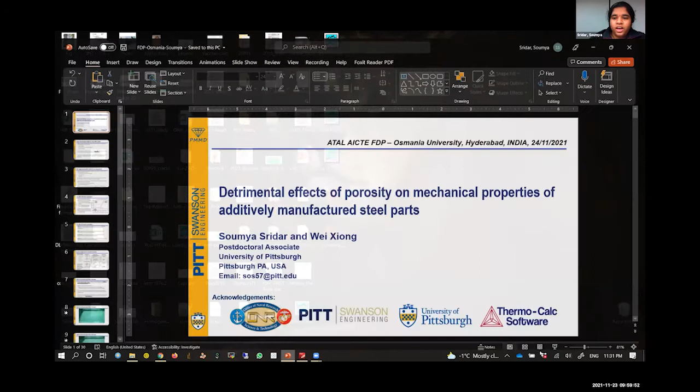Good morning, everybody. It's morning in India, but it's midnight in the USA right now. So I'm Soumya Sridar, and Srividya has already given me a fair amount of a good introduction about me.

So let me go directly into the talk. I'll be talking today mostly about the ill effects of porosity on mainly the mechanical properties of additively manufactured steel parts. I do know that these sessions are mostly related with novel materials, but today what I want to show is how additive manufacturing can be applied to an age-old material, a material that has been studied for the last 70 to 80 years, but mainly a weldable material, a material that is used for welding. Now, how to apply additive manufacturing, and some research lessons out of it, I would say.

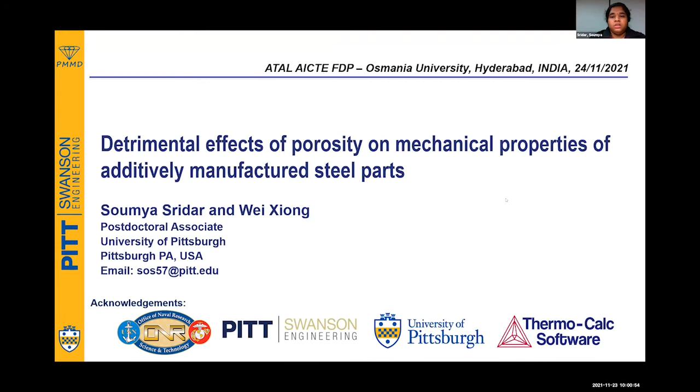So first, the material what I'm going to talk about is copper bearing high strength low alloy steels. As the name says, it's a high strength, low alloying content, but has copper. And these are mainly developed for naval applications. The three key features for the steel are: one is their high strength, as the name says, excellent low temperature toughness. As I mentioned that it is for naval application, it has to stand in the sea at ocean temperatures, like -20, -40 degrees C. And the ductile to brittle transition has to be at a pretty much lower temperature.

Otherwise, best example is the Titanic ship. Titanic hit and broke because it reached the ductile to brittle transition. So it should have excellent low temperature toughness. And the third one is good weldability, because we all know that while building a ship hull, the plates are welded together, so good weldability is needed.

So there are different grades of HSLA steels available. Generally their names will be called like HSLA 80, 100, 115, as I have shown here. These numbers denote the minimum yield strength in KSI. Since it was developed in the US, they simply put the imperial units, but it's in KSI. So 100 KSI roughly comes to around 700 megapascal. So the minimum tensile yield strength should be 100 KSI, let's say it's HSLA 100, should be 100 KSI or somewhere close to 700 megapascal.

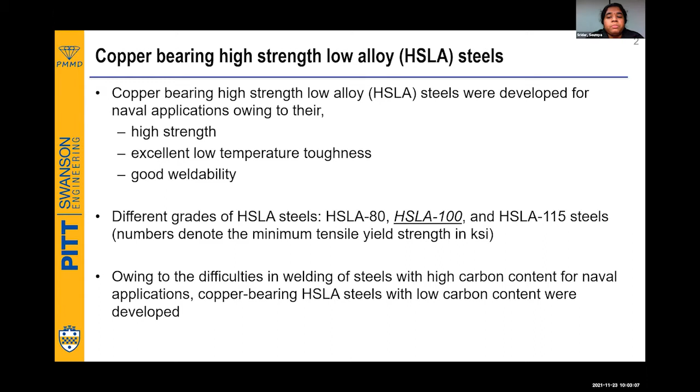Now, why were these developed? Mainly because high carbon content is going to have difficulties in welding, and for naval applications we need weldable steels. So copper bearing high strength low alloy steels with low carbon content were developed mainly for the purpose of improving the weldability.

Next, why copper bearing HSLA for naval application? If we see the reason why this has been chosen, let's first see what are all the applications. It's going to be used in submarines, offshore structures, line pipes, and ship hulls. So the main application is ship hulls, which is going to be directly in contact with the seawater.

Now, the main point is that here, when the yield strength is good, please forgive me that I added mostly in KSI, but I've also given the corresponding values in megapascal for you to have a sense of what the strength value should be.

So some 55 KSI to 80 KSI increase in yield strength, the weight reduction is nearly 800 tons. It's a huge number, so it's a weight effective way of dealing with the material.

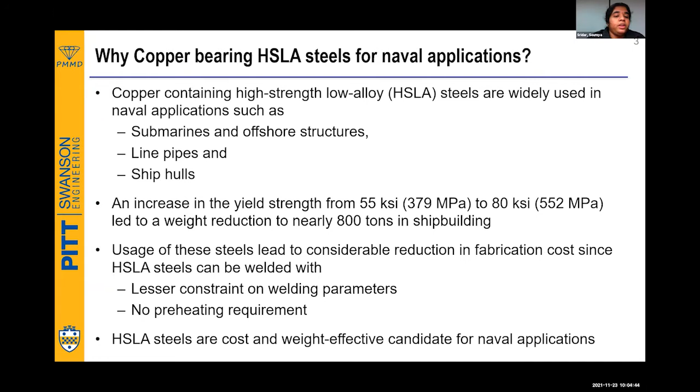Second, we are going to have very good weldable steels. Steels with very good weldability mean we are reducing the fabrication cost. The weldability has been improved by having lesser constraint on the welding parameters, and most importantly, no preheating. In high carbon steels, you need preheating to reduce cracking in the heat affected zone. That is what we are trying to avoid here, no preheating and lesser constraint on welding parameters.

Among the steels I mentioned, HSLA 80, 100, 115, and so on, HSLA 100 is more or less very popular. HSLA 100 and 115 are very close in composition and strength. So HSLA 100 is the mostly sought after steel. Let me go one by one through what's going on.

So the carbon, I'm talking about low carbon steel. What is the carbon content? It is less than 0.06 weight percentage. Why is this amount of carbon chosen? Let me switch on the laser pointer. That is because of this Graville weldability diagram. It's a plot between the carbon content and the carbon equivalent, which is calculated using this formula. It's completely empirical.

If you see here, there are three zones. Zone 1, if your composition is in zone 1, it is going to be safe under all conditions. Zone 2, it may fail or may not fail. Zone 3 is going to fail without any doubt. So we have to choose a carbon composition and carbon equivalent such that the weldability is always restricted to zone 1. That is the reason why this carbon content has been chosen.

Secondly, this main problem of hydrogen induced cracking. This hydrogen induced cracking is actually a delayed fracture, happening because of hydrogen, since it is standing in water for a long time, there is always a possibility for hydrogen to enter. The problem with hydrogen induced cracking is there's no guarantee it will fail immediately. After the hydrogen enters and creates the embrittlement, it can either break today or break even after 2 months. That is the problem with hydrogen induced cracking.

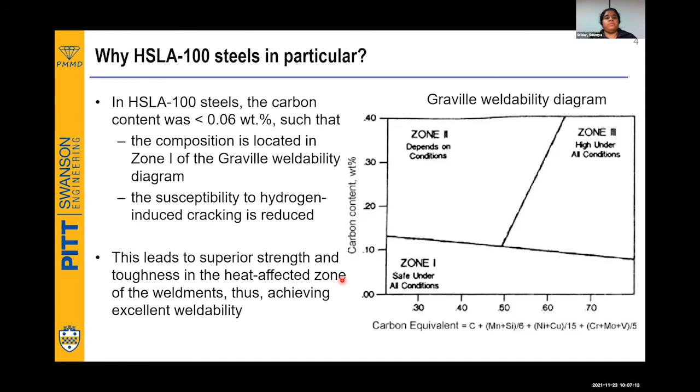We have reduced the carbon content, but we all know carbon is the main strengthening element in steels, and we are reducing it. How are we going to compensate for that? The main addition for that is copper first. So copper is being added, that's why it's called copper bearing high strength low alloy steel.

Copper is going to induce precipitation hardening by forming pure copper precipitates, sometimes even called clusters. This is going to balance the loss of strength due to lowering the carbon concentration. So it's like a nested problem: if you reduce the carbon, the strength is gone. Now you're adding copper to improve strength, but copper is an element that segregates in the grain boundaries and causes hot cracking, and to compensate that, you add nickel.

Finally, we also add molybdenum for precipitating another type of precipitate called M2C, where M corresponds to molybdenum, another type of carbide. In order to precipitate another type of carbide commonly found in steels, we add niobium, which precipitates niobium carbides. These are called pinning particles, they sit in the grain boundaries during the austenitization process and inhibit, that is stop, the grain growth. That's why niobium is added.

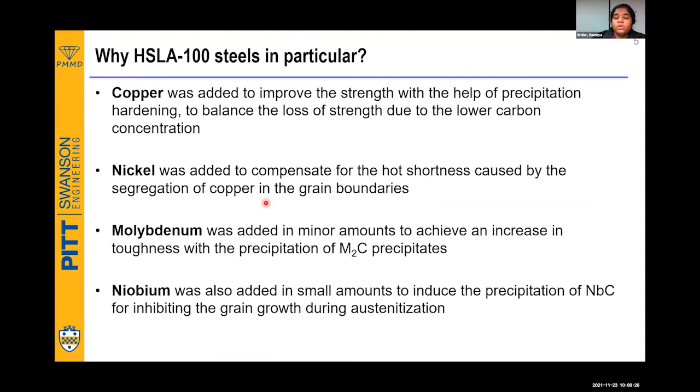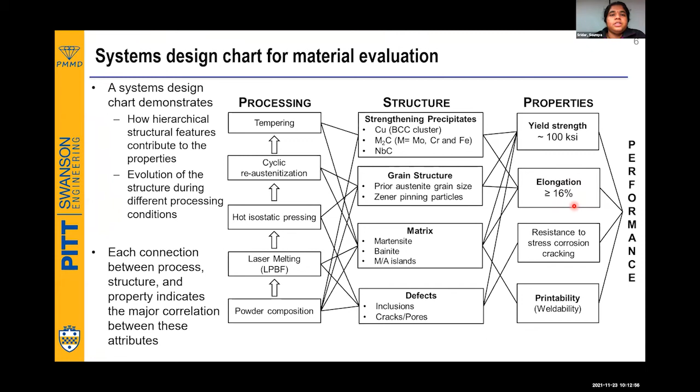So, additive manufacturing - this is just a primer. I think many would have spoken a lot about additive manufacturing. For the sake of continuity, I am just giving a few points about it. Additive manufacturing is a process for fabricating, layer by layer,

fabrication using 3D numerical models, which is completely different from the traditional subtractive manufacturing technologies. You don't take a big billet and then machine it to get the part. Rather, you're adding layer by layer to get the required part you want. And one more important thing to keep in mind is it's a near net shape forming process.

And how do we classify it? There are loads of parameters based on which it can be classified. But mainly, if we have to see, it is based on material. I think I'm a material science person, so from a material science point of view, I find these two to be the most important classifications.

One is based on material feedstock - that is, you have a powder bed process, powder feed process. Powder bed is nothing but the LPBF, that is laser powder bed fusion, or they also call it SLM, selective laser melting. Powder feed, that is directed energy deposition, DED. This is powder feed. Another one is wire feed.

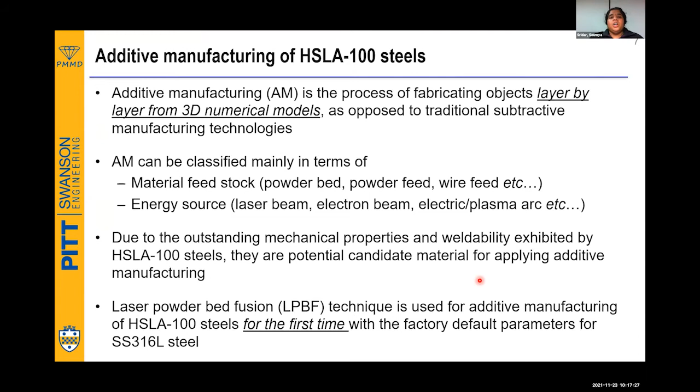Instead of me showing some schematics, I thought I could try to play a video here which was shot during our printing of the HSLA steel powder.

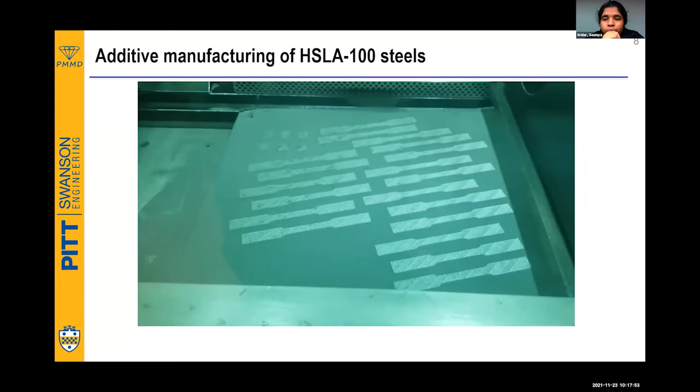You see the recoater spreading a uniform layer of powder, and the laser is going to hit it. We are trying to build tensile bars here; our build plate dimension is 250mm by 250mm. If you notice carefully towards the end, there is something going around along the periphery - that fast scanning is done to create a better surface finish, called a contour print.

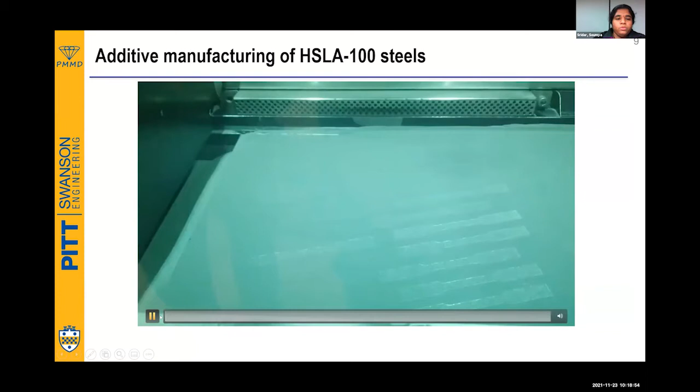Now you see the laser scanning going more or less parallel to each other. I think it won't run long. So this is layer 1. Let me go to the next layer, layer 2, to show how it's being built - layer 1 has now been built.

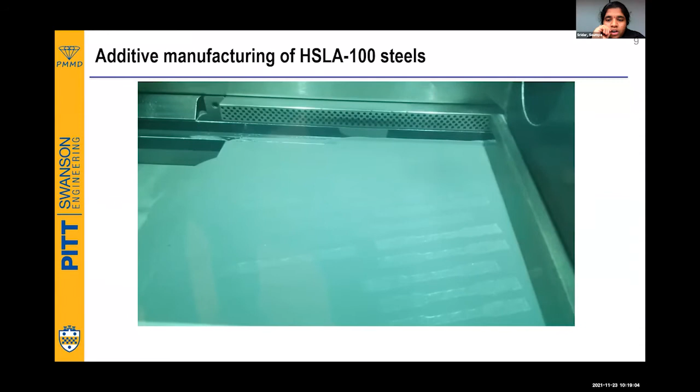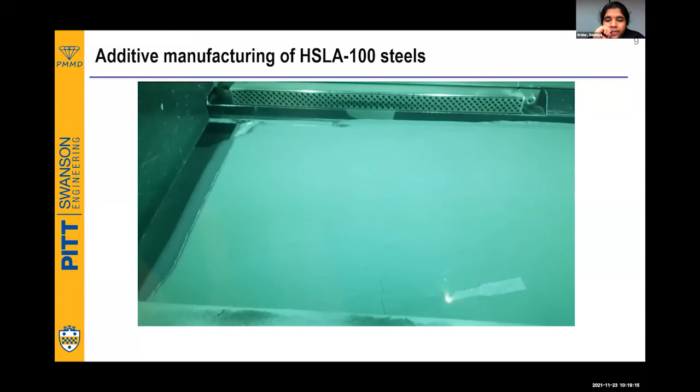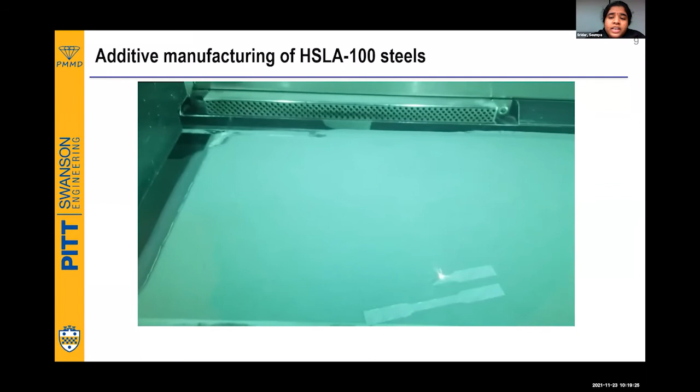Now the recoater is going to spread the next layer of powder. Here we go - please see the orientation of the laser, we are rotating it, right? Initially the first layer was completely horizontal, and now it's slanting at an angle. I think typically we use an angle of 67 degrees.

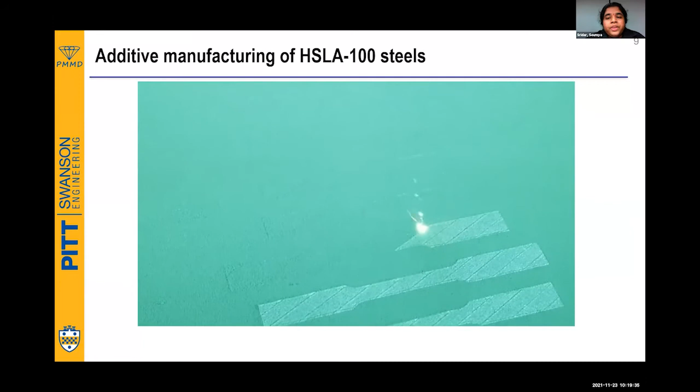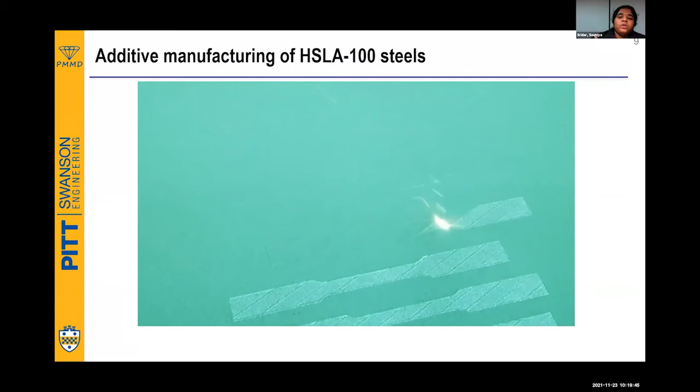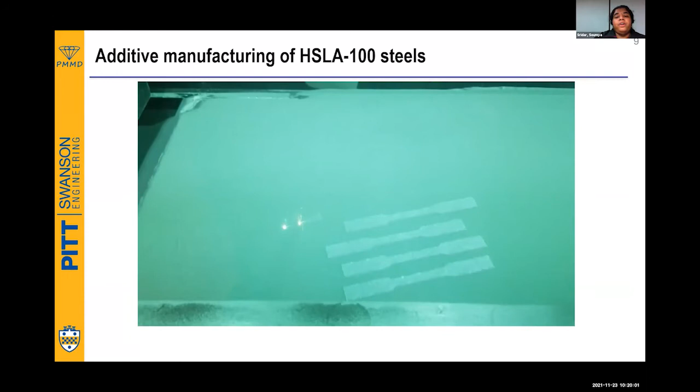Close up view - this is done mainly to avoid residual stresses. So in layer 1, the rastering happens parallel to each other, and in layer 2 we rotate it by 66 degrees. Again layer 3 is horizontal, layer 4 is 66 degrees. We do this complete rotation change for every layer to avoid the buildup of residual stresses.

Okay, now, sorry, give me a minute.

So here I'm showing a build plate. Let me switch on the... So this is the build plate. This is a 250 mm by 250 mm build plate.

And these are basically fatigue bars which we built recently. And you see that we don't keep the samples parallel to each other. We slightly slant it a bit by 5 degrees, which has a particular reason.

But yeah, so these are all the horizontal prints, and this is a vertical print. So this is a vertical tensile bar. I hope it is visible as a tensile bar in a certain direction. So these are all vertical prints.

So typically when we do prints, in order to study the effect of orientation, we build horizontal bars like this, vertical bars like this, and also bars that are slanted at 45 degrees to the build direction. So in order to study the effect of anisotropy on the mechanical properties, we generally do this, but mostly horizontal and vertical should suffice in most of the cases.

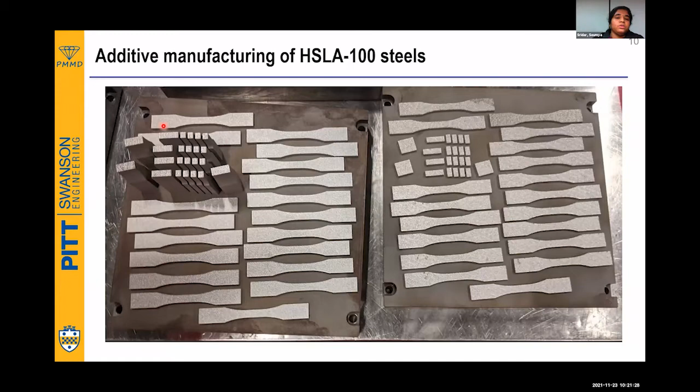So just wanted you all to see how the build plate looks and so on. So coming to the important thing, the role of porosity.

So always porosity is a problem in most of the cases, but here in the case of AM parts, mainly two types of properties are going to be affected. First one is the mechanical properties, where it is going to affect the tensile strength and the elongation by acting as local stress raisers.

However, the pores will also affect the corrosion resistance, because pores are nothing but pits, which can be viewed as a primer for pitting corrosion. So the corrosion rate within the pits will build up because of severe electrolytic conditions, leading to a stable pit growth.

And a small pit which goes throughout the sample is going to lead to cracking further. Also, the effect of presence of residual or applied stresses can lead to stress corrosion cracking. Hence all these three problems are not simple and have to be dealt with.

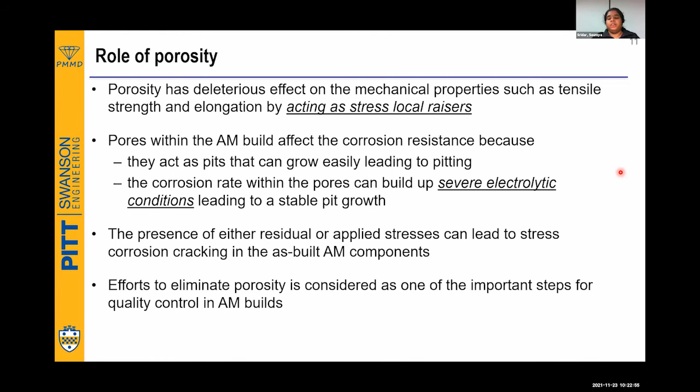So eliminating porosity is one of the important steps for quality control of AM. If you want to really put your additively manufactured component into service, porosity has to be eliminated by any chance. Now, as such, we can see a pore is a hole or something like that, but it's not so simple when it comes to AM builds.

There are three types of pores that have been identified for AM processes. The first one is called the type 1 pore. Type 1 pores are perfectly spherical pores that form due to entrapment of shielding gases. What happens is the gases get trapped within the melt pool and are not able to escape due to the vapor pressure.

But the good news about this type of pore is that it's typically not detrimental, because of two reasons. One, they are spherical, so spherical pores are not a serious issue. And secondly, they are only a few nanometers to micrometers in size. They are not very huge pores.

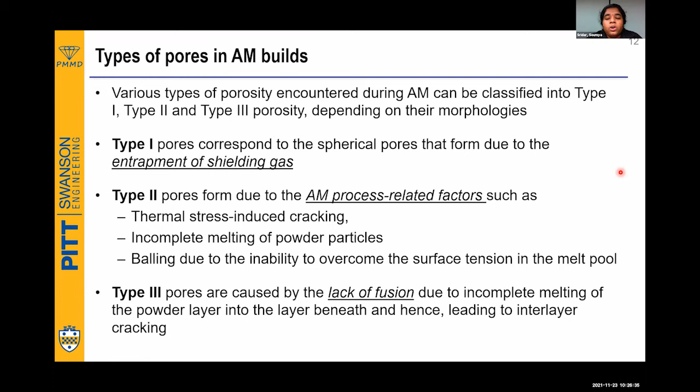These interlayer cracks will generally be of lesser circularity, so they won't be as spherical as the type 1 pores. These are some of the types of pores found in one of our AM builds, I would say.

You see that the type 1 pores here are more or less typically spherical. The type 2 pores, no wonder they are dangerous—as you can see, they are pretty sharp, and they are surely going to act as stress raisers. You can see this one, and so on.

And type 3, you can clearly see a melt pool will generally be a cup-shaped melt pool like this. You can clearly see a lack of fusion happening here, which is a type 3 pore. As I mentioned, this is why it's called low circularity, and this one is more or less circular.

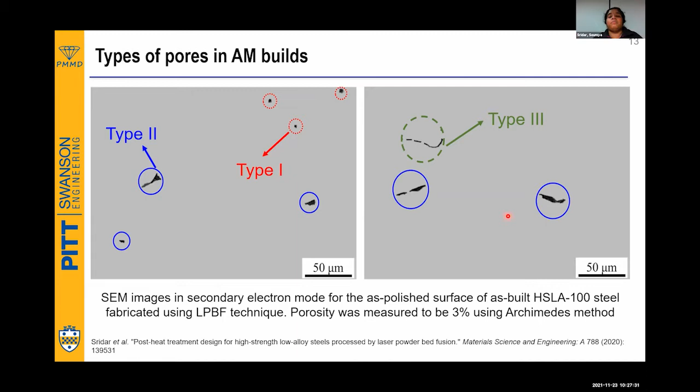Now the porosity measured for this build using the Archimedes method is around 3%, which is an alarmingly high porosity. So what are all the ways to mitigate porosity in a porous AM build?

If a build becomes a failure, we don't always need to throw it out, because we have spent a lot of energy, and they even charge us for doing additive manufacturing builds here.

So there are two ways to mitigate: one is to design an appropriate post heat treatment schedule, and the second is to optimize the printing parameters.

When I project these two solutions, it's kind of common sense to say that before you start printing, just optimize the printing parameters for the AM process, for that particular process, and then build all your tensile bars and so on.

But we need to understand that in many cases we won't have enough powder. We are not always having kilos and kilos of powder which we can lavishly use. Sometimes the amount of powder available to us might be pretty low.

If that's the case, to optimize the printing parameters, what we generally do is build cubes with different printing parameters—like different scan speed and laser power—print the cubes, find the porosity levels using Archimedes, and do a second level of checking with the closed pores, and then figure it out.

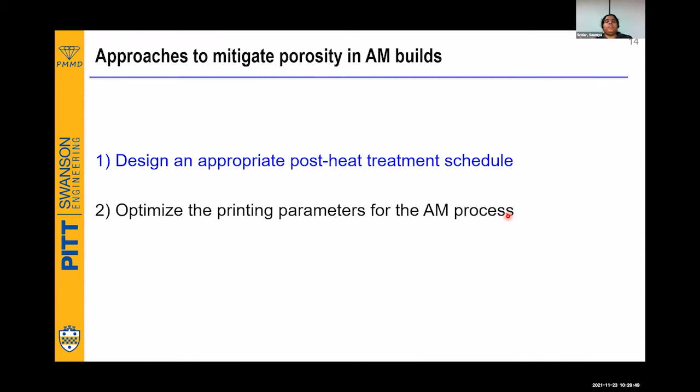So in this talk today, I will mainly be dealing with how to design an appropriate post heat treatment process to reduce the porosity. The post heat treatment I am going to propose is hot isostatic pressing.

This hot isostatic pressing is a well-known process—many of you might already know it. The idea is we have a pressure vessel in which we keep our component, and there is a heater, and pressure is applied isostatically, meaning equal pressure in all directions, using an inert gas atmosphere to avoid oxidation or other related problems.

So why do we go for hot isostatic pressing? As I mentioned, we do it at high pressure and high enough temperature in an inert gas atmosphere, and it closes the pores. What we want is pore closure—either collapse of pores or pore closure—which happens through either plastic flow or some material transport. But why HIP?

As I emphasized earlier, additive manufacturing is a near net shape forming process, so I should not do any post heat treatment process that would spoil the shape.

Every time we're not going to build only simple cubes. If we're building a particular part, let's say a tensile bar, I need to maintain the correct dimensions according to the ASTM E8 standards. I cannot afford to lose the shape or mess up the dimensions, so we have to maintain the shape. For this, HIP is the best method because the pressure will be applied uniformly throughout the sample in all directions.

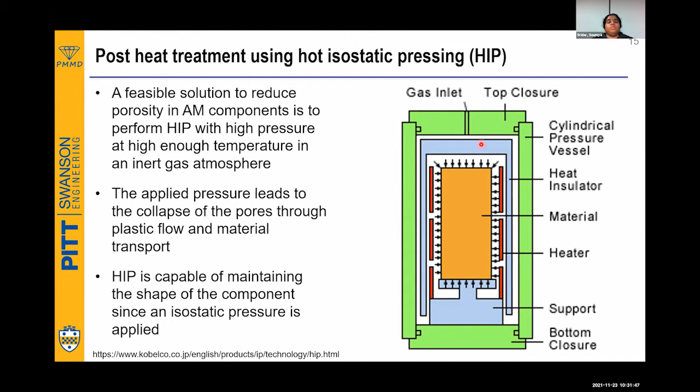So we have to do HIP, but we have to design it. For this reason, we use this calculation of phase diagrams method. I think we will be having a further talk by Dr. Guru Vidyarthi, who will be explaining this more. I and Guru are former colleagues, by the way.

So the fact is that we use this phase fraction diagram. These are all the different phases that are forming in this particular steel I'm talking about, as a function of temperature. I hope everyone will be familiar with the AC3 temperature. AC3 temperature for a steel is the temperature at which the material becomes complete austenite. Now, the AC3 temperature for this steel is going to be 754 degrees C, as calculated using this CALPHAD method.

However, due to the errors, because this is an equilibrium calculation and there could be other effects since what we are doing is a completely non-equilibrium process, additive manufacturing, to take that into account, we are increasing the austenitization temperature to more than 200 degrees C above, setting a temperature of 950 degrees C.

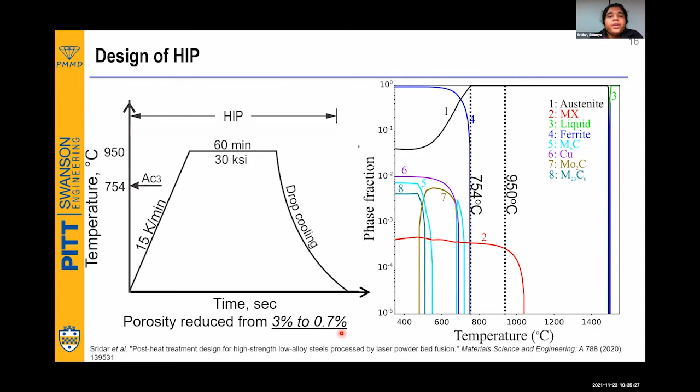But the good fact we should be happy about is that the porosity reduced from 3% to 0.7%, which is a very good number. So whatever we wanted has been achieved. Yes, we reduced the porosity thanks to HIP, but my microstructure is gone. How? It has terribly coarsened the microstructure. So this is the before-HIP microstructure, and this is the after-HIP microstructure.

So these are the SEM micrographs, and you see there are two types of phases here: one with a surface relief, and one without surface relief. The one with surface relief is the martensite, which I call the hard phase. And the one without surface relief is called the bainite, which is the soft phase.

Now you see how fine it is here, but after I apply HIP, my bainite is growing, my martensite has become huge and so on. Thanks to this very slow cooling rate, my material has literally become spoiled now. If I'm going to check the mechanical properties, though the porosity has been closed, this spoiled microstructure is going to reduce the strength of the material pretty badly. So it has.

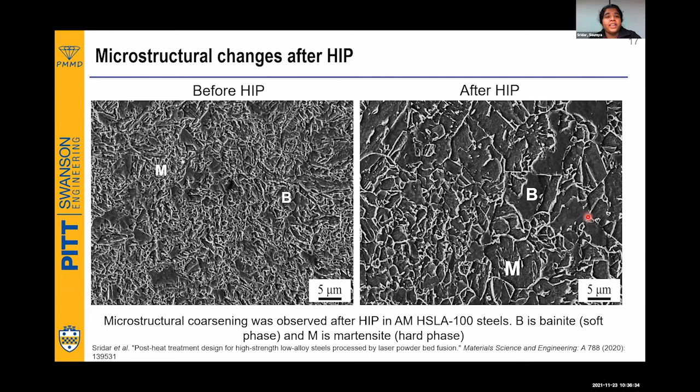This is the reason why I'm emphasizing that this is spoiled. How am I going to bring it back from that spoiled microstructure after HIP? This process is called cyclic reaustenization.

This is a post process where I have to do a grain refinement, since there is microstructure coarsening or grain coarsening. But this is near net shape processing, so I cannot do any deformation process to bring it back.

One common method for grain refinement is ausforming, AUSFORMING. If anyone is interested, they can read about it. But that will involve external forces, and we don't want any process with external forces applied.

So we go into this cyclic reaustenization. What are we going to do? After cooling has happened, we reaustenize, taking it to 950 degrees C again in a furnace without any pressure, above the AC3 temperature, for a very short time - just 1 minute - and then immediately water quench.

Water quench, not normal water quench, but ice water quench. And we do one more cycle. So this is one cycle: heating, holding for 1 minute, cooling, heating, holding for 1 minute, cooling. This is cycle 1 and cycle 2.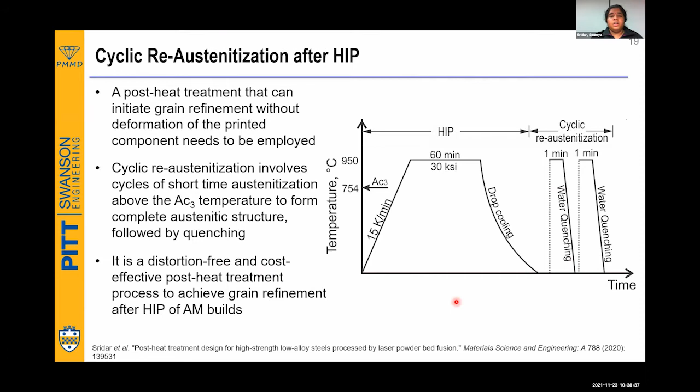We designed an experiment where initially we take it to 950 degrees C, all without pressure, hold it for 40 minutes to make sure the material has been completely austenitized, and then cool it. Ice water quenching typically has a cooling rate, a ballpark figure of 130 Kelvin per second, but we are trying to cool with a cooling rate of 100 Kelvin per second.

Then we are doing different numbers of cycles, with 1 minute holding at 950 degrees C. We tried 4 different cycles: 0th, 1st, 2nd, 3rd, and 4th.

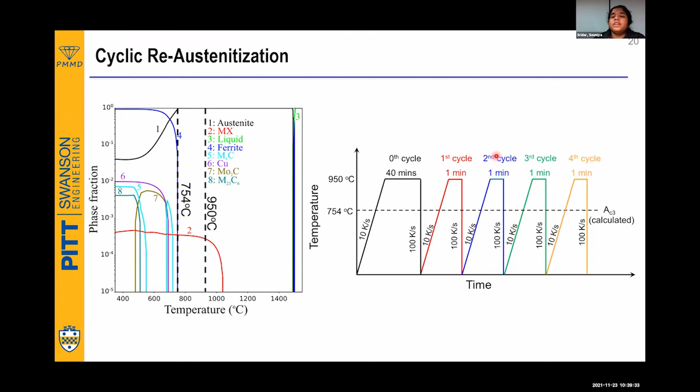And how are we going to do this? This is a not-so-new technique known as the quenching dilatometer. In the quenching dilatometer, it's a very interesting instrument where you have two push rods where you place your sample, sitting between these two push rods, and a copper coil that slides into position.

In the middle of the sample, you have a thermocouple welded that takes care of the temperature. And there's an LVDT which is going to check or record the length changes - LVDT is known for measuring very sensitive length changes.

You also have gas outlets, since we are going to cool it. In our case we were using helium gas, because even argon is not sufficient - we need helium gas to achieve such high cooling rates, literally cooling at a rate of 100 Kelvin per second.

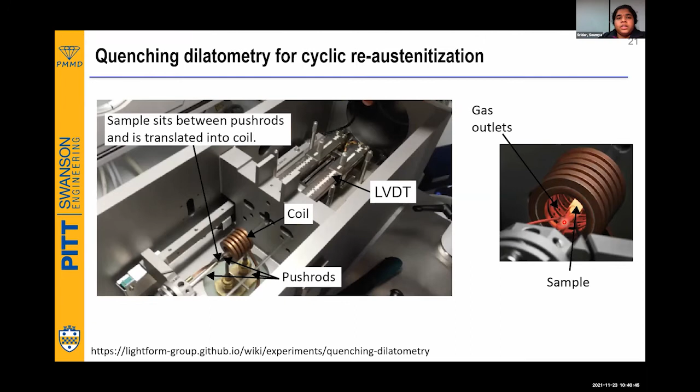What we get from this quenching dilatometry is the length change, measured by the LVDT, but we always take the percentage, that is delta L by L0 - L0 being the initial length, delta L the change in length, in percentage, along with the corresponding temperature. This is recorded and given by the software directly.

So what can we understand from this curve? One thing is that whenever there is a phase transformation happening, there is a volume change, which corresponds to a length change, and we can figure out the transformation temperatures. There are two types of changes - one is an obvious change.

Let me explain the curve here. This is the heating curve where we are starting at around room temperature, let's say 27 degrees C. You keep heating, you reach this temperature here, and there you go: austenitization. The austenite starts to form, which is the AC1, and the austenitization completely finishes, which is the AC3.

It keeps increasing, and then you have some waiting time, either 1 minute or 40 minutes. Then it drops down, and you start cooling at 100 Kelvin per second. It's going to go, and there is a slight slope change which corresponds to the bainite start. BS here corresponds to the bainite start temperature. Then you see an obvious change where this corresponds to the start of the martensite, which is the MS temperature, and this corresponds to the finish of the martensite transformation, which is the MF temperature. And again, it goes back to room temperature.

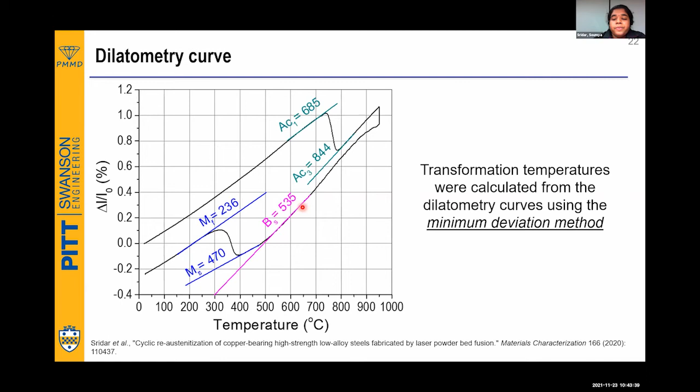So this is a typical introduction for quenching dilatometry, but our purpose is not that. I want to figure out the optimum number of cycles. So we did two things. One is find the micro hardness, and we find a sudden increase in hardness at 2 cycles.

And then what's going on? We do nano hardness using nano indentation, and what we see is that in nano indentation you can find the particular phase and make the indent in that phase. Here I'm showing 2 SPM images. SPM means scanning probe microscopy, which is generally attached with the nano indenter, such that you can allow it to scan through and see the topography of the microstructure.

Now, I already showed in the SEM micrograph that the martensite has surface relief, the bainite doesn't have surface relief. So you can see that this is a nano indent in the martensite, and this is a nano indent in the bainite. From the nano hardness, there is a slight change in the bainite hardness, however there is a notable change in the hardness of the martensite. This is not something which is usual.

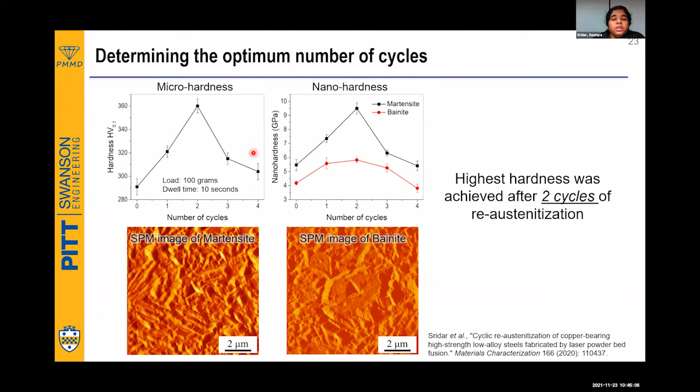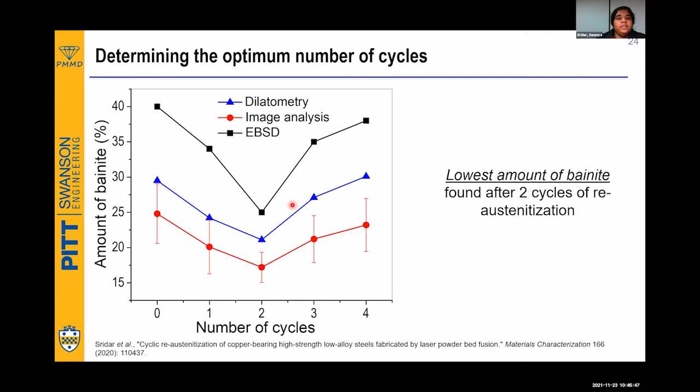So we probed it further to understand why this is happening, and we find that we have tried to calculate the amount of bainite from different techniques like image analysis, dilatometry, and electron backscatter diffraction. Though the numbers are slightly different from each other, one thing we can see is that for the optimum number of cycles, which is 2 cycles of reaustenization, the bainite content is the lowest, which means the martensite content is the highest. As I mentioned earlier, martensite is the hard phase, bainite is the soft phase. Lesser the soft phase, more hard it is going to be. Hence the optimum number of cycles was chosen to be 2.

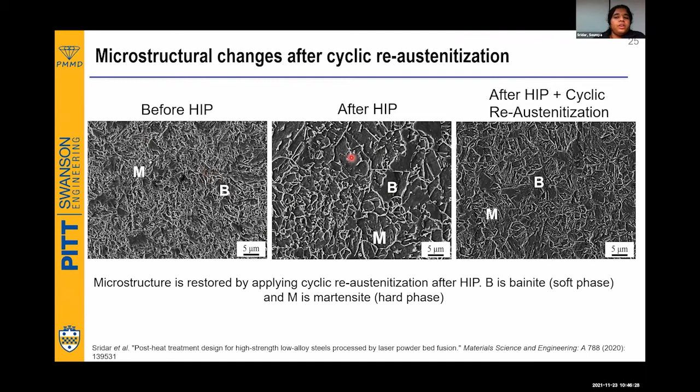With all this, was I able to reclaim the microstructure or not? Thankfully, yes. Before HIP, that is just the as-built structure, and after the cyclic reaustenization, after HIP and cyclic reaustenization, more or less we restored the microstructure. Coming to the bainite content, which is the soft phase content, measured using EBSD: before HIP it was 8%, after HIP it was a huge 33%, and now it has come down to 11%. So yes, we are fairly doing good, we have reclaimed the microstructure. But this is not sufficient.

So the next step is to do a tempering heat treatment to induce strength. Why? Because copper is going to induce precipitation strengthening, and similarly, addition of molybdenum is to induce the Mo2C precipitates. So in order to induce the precipitation strengthening, you have to allow them to temper, that is, you identify a particular tempering temperature. Again, from this diagram, since copper and the Mo2C are the major curves, that is curve 6 and 7, at close to 550 degrees C, the content of both 6, that is copper, and 7, that is Mo2C, are very high.

So we choose a temperature of 550 degrees C as the tempering temperature. At this temperature, we expect copper and MO2C precipitates will strengthen the HSLA 100 steel. We figure out the optimum tempering time by finding the peak hardness.

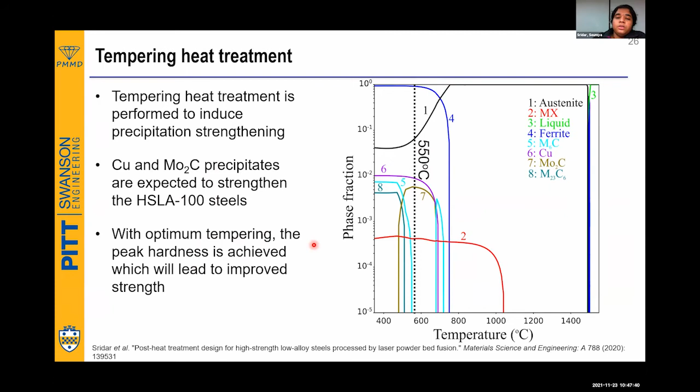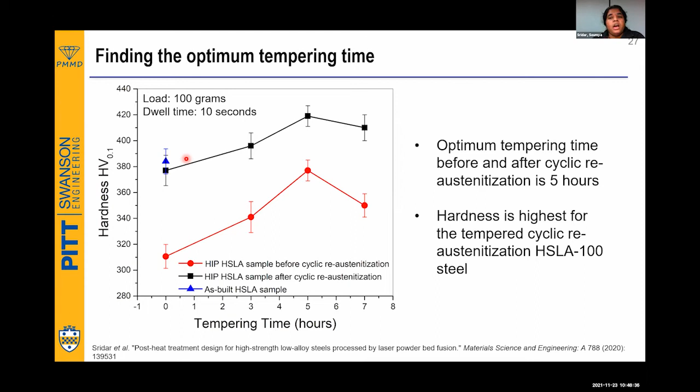But hardness is not always the indicator of achieving good mechanical properties, and we need to do tensile testing - looking at the stress versus strain curve. These tests were performed at a strain rate of 0.03 per minute inverse.

The as-built steel has pretty bad ductility. But the tempered HIP HSLA before cyclic reaustenization - sorry, before cyclic - has very good ductility.

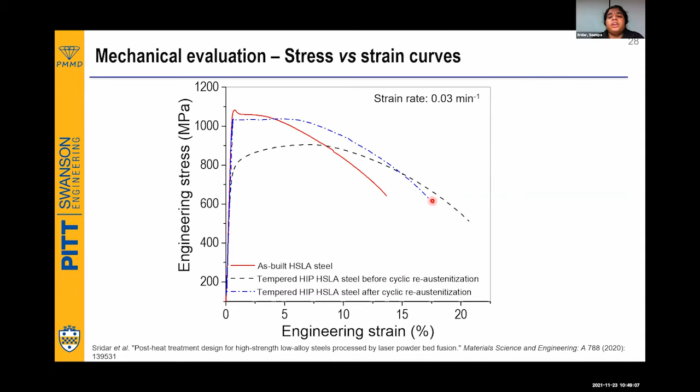Let's look into the actual values. What we see is that the yield strength has improved a bit - just a bit, I would say - but it is well above the design target, even in the as-built condition. The design target is 100 KSI, which is pretty close to 700 MPa, and the elongation target is 16%.

If you see the yield strength curve, which is the one with square symbols, the yield strength in the as-built is slightly lower than the one for tempered HIP after cyclic reaustenization.

But the improvement in elongation is considerable. Here it was only 13% elongation, however we are almost hitting 20%.

Of course, the tempered HIP before cyclic reaustenization has higher elongation because it has more of that soft phase, which is the bainite. However, its yield strength is very low. So from this design we can clearly see we have achieved the design target, reaching close to 20% elongation.

So from this design, what we found is that we now have a steel with very low porosity - only 0.7% - but with very good yield strength and very good ductility. Initially the porosity was high, yield strength was good, but ductility was bad. Now the porosity is low, the yield strength is also high, and the ductility is also high. This is the success of this design.

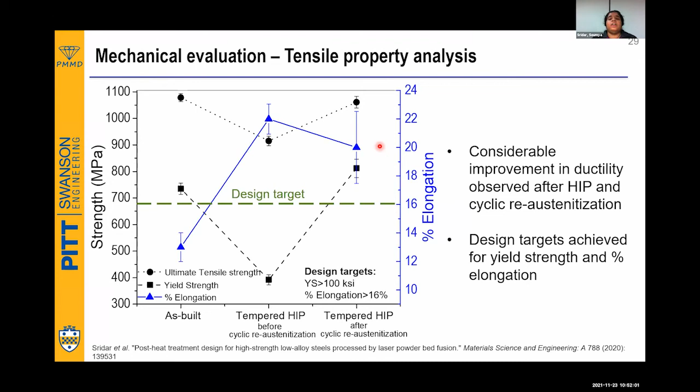So it's not always a failure. If we have porosity, what I mean is we need not throw it into the trash can or dump it - you can still work on it and improve the properties.